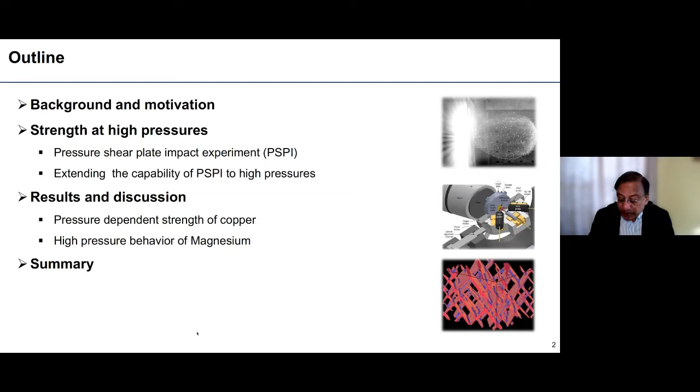First I will give you some background and motivation for why we are doing this work, then I'll talk about the pressure shear plate impact experiments and extending the capability of this technique to high pressures. Then I will present results on two materials, primarily copper, which is a good model material to validate this technique and to look at interesting phenomena at high pressures, as well as a brief introduction to the high pressure behavior of magnesium, and then provide a summary.

So why do we study this high pressure behavior? As this audience knows well, there are impacts and blast events, many involving very high pressures, ranging from bird impact to hypervelocity impact.

There are many impact events, some of which are shown here. Bird impact is a major problem for airliners. For example, this was the landing known as the Miracle on Hudson, a US Airways flight taking off from New York that was hit by birds and had to land on the river. Miraculously, everybody survived.

Of course, ballistics and armor/anti-armor problems are of great interest. And hypervelocity impact, which involves very, very high pressures, is also of interest. Hypervelocity impact could be anywhere from 2 to 20 kilometers per second, reaching very high pressures and very high temperatures. So we want to understand high strain rate, high pressure phenomena in these cases.

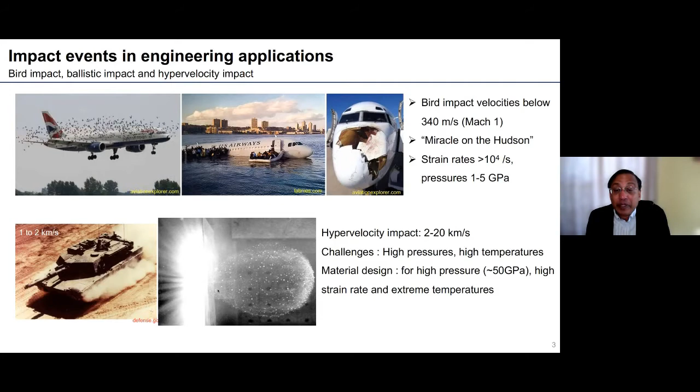To model such problems, we need accurate constitutive models. These models, as we know, are a function of strain rate, temperature, and other variables. Typically we don't consider pressure at relatively nominal levels, say on the order of 5 to 10 GPa for most metals, since these pressure effects are not important. But we are interested in very, very high pressures.

As mentioned, one of the applications is hypervelocity impact. You can imagine the number of objects in the vicinity of the Earth that are tracked every day is very large, with small or bigger objects traveling at velocities in the range of 5 to 25 kilometers per second.

Of course, this can cause considerable damage if they impact space assets like the International Space Station. Here I show one example where the Zarya section of the International Space Station was impacted by a micrometeorite. This could have deleterious effects on structures, space structures.

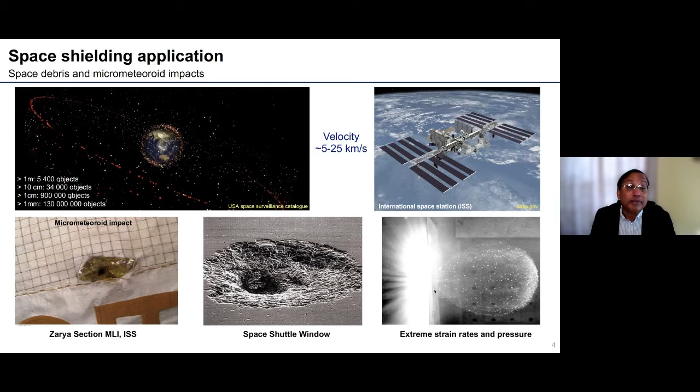And obviously we know from hypervelocity impact, we could have phase transformations, not only from solid to fluid to plasma, but also materials undergoing solid-to-solid phase transformation and other associated phenomena. So we need to understand such phenomena in great detail and be able to model it. The other applications are both terrestrial and space applications.

For example, in planetary science and recent energy applications such as creating fusion in the lab, this involves very, very high pressures. For instance, in the creation of our own moon about 4.5 billion years ago, due to the giant impact hypothesis, there was an impact on the proto-Earth which created the moon. To model such impacts, one needs to know the high pressure behavior of materials, including strength and flow behavior, to accurately model this phenomenon.

In geophysical applications, these high pressures are very common. For example, the pressure at the core of the Earth is around 360 gigapascals, which is very high, and one needs to model the material behavior at this very, very high pressure. If you go to planets like Jupiter, this could approach 1 terapascal.

As I mentioned earlier, inertial confinement fusion is one of the holy grails in creating clean energy. You want to produce the conditions in the sun, which can approach 10 to the power 4 terapascals—these are very large pressures.

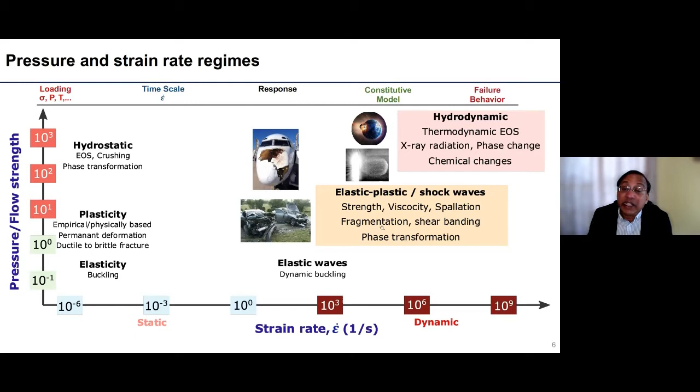We want to understand this whole range of phenomena. One of the things that governs fragmentation and failure is the strength of the material, which is what we are interested in understanding at high pressures. We have numerous techniques to address these problems.

At low strain rates, one uses hydraulic or servo-hydraulic machines, or screw-driven machines, to understand the strength behavior of materials—yield stress and flow behavior—which is very well characterized. Another technique used for high pressures is the diamond anvil cell, a very elegant technique that can reach very high pressures, but under quasi-static conditions.

When you go to high strain rates, one uses techniques such as plate impact. Many of us work with the Kolsky bar, or Split-Hopkinson bar. In this case, the pressure is nominally zero due to the limited uniaxial stress condition, and it can reach high strain rates on the order of 10 to the power 4 per second.

With recent advances in technology, numerous facilities are now available, such as the Z machine at Sandia National Labs, which can reach pressures on the order of 1 terapascal, and the National Ignition Facility at Lawrence Livermore National Lab, which can reach very high pressures. People have looked at the equation of state of materials in the terapascal regime.

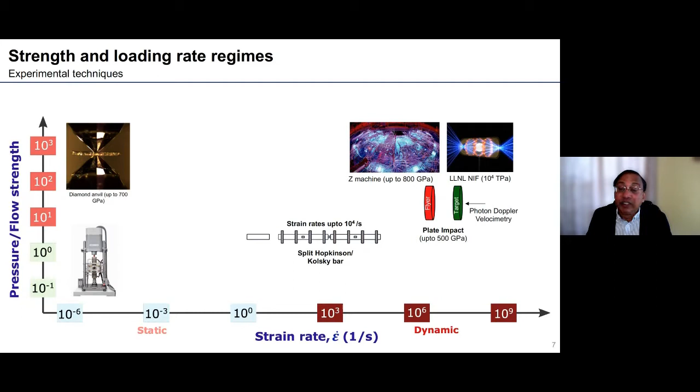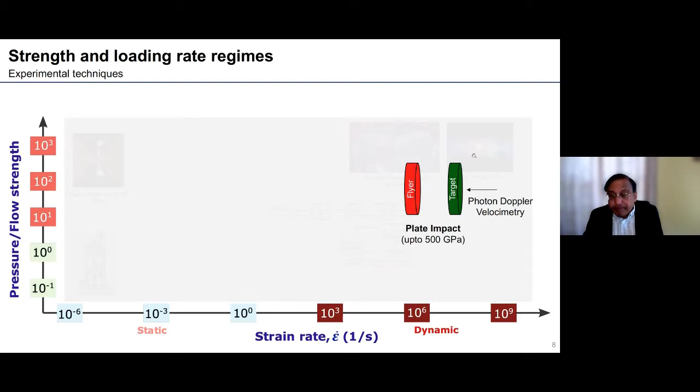The normal plate impact technique uses methods such as PDV, photon Doppler velocimetry, or VISAR, to measure the response at the free surface or at the interface with a window, to understand the evolution of the normal velocity profile, from which one can obtain the equation of state. This is a well-established shock wave technique, where an impactor impacts a target, generating a shock wave and uniaxial strain conditions—strain only in the direction of compression—achieving a stress state close to hydrodynamic.

Here you have the normal stress and the transverse stresses. Due to the inertial confinement, at very high pressures, you could approach a hydrodynamic state of stress. Nevertheless, the strength of the material is important at these high pressures, meaning the transverse stresses, sigma y and sigma z, which are equal,

differ from this normal stress, and that's where you have the shear stress. If you use the Tresca condition, the strength of the material could be an order or few orders of magnitude smaller than the pressure. This poses great challenges in measuring the strength of the material because it's a small number compared to the pressure. So you need a way of directly assessing the strength of the material at these high pressures.

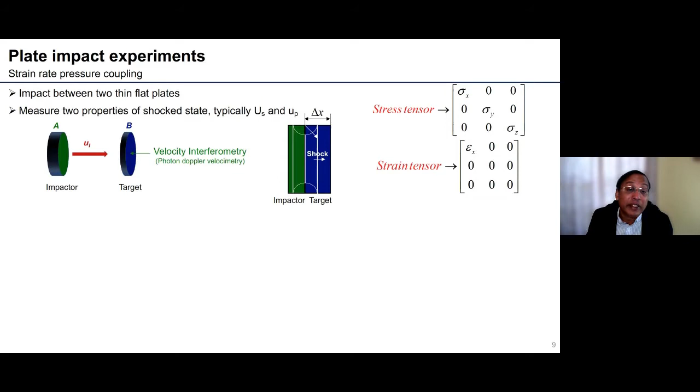One of the primary uses for this work is to create the so-called equation of state, the relation between the particle velocity and the shock wave speed. The shock wave speed can be measured by the arrival time at the free surface, and the particle velocity is measured by the free surface velocity. Then normally one sees a linear US-UP relation, the linear relation between the shock wave speed and the particle velocity.

One can obtain the normal stress by using the jump conditions, or the Rankine-Hugoniot conditions, using the formula of density times the shock wave speed times the particle velocity.

Many of us are interested in the flow strength of the material as a function of strain rate. As we approach the high strain rate regime beyond strain rates of about 10^3 per second, at least in metals, you have dislocation drag control mechanisms where you see a sharp rise in the flow strength of the material as a function of strain rate. As you approach strain rates of 10^6 to 10^9, this flow strength would be extremely high.

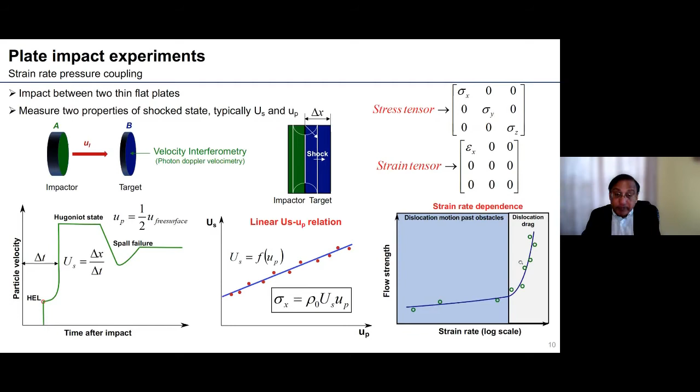We are not the first ones to think about how to measure strength at high pressures, but there are many challenges associated with measuring strength at high pressures.

One very interesting technique used both in plate impact or impact-related experiments, as well as laser shock experiments, is using the Rayleigh-Taylor instabilities, whereby you put small perturbations on the surface of the material, and this is being shocked. While being shocked, these perturbations grow due to the Rayleigh-Taylor instabilities or Richtmyer-Meshkov instabilities.

As you shock the material, if the material is strong or the strength is high, the ripple growth will be small. If the material is weak or has low strength, the ripple growth will be high. This gives a qualitative measure of the strength of the material, and one can do numerical simulations of this instability growth, then achieve high pressures and obtain the strength. But at the same time, there is high uncertainty in the coupling of strain rate and pressure, because in this ripple growth, the strain rate and pressures vary, or they're spatially non-uniform.

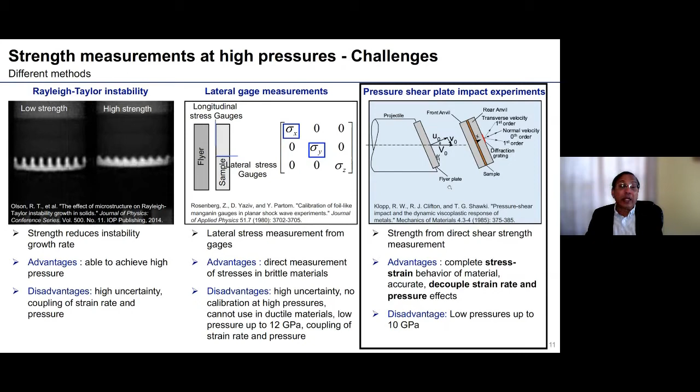This was the technique developed by Professor Clifton at Brown University, as I mentioned, four decades ago. It involves impacting this hard plate against the target, which consists of two anvil plates with a sample sandwiched in between.

You generate both normal and shear waves in the anvil plates, in the target, and the flyer plate. The longitudinal waves, or pressure waves, propagate faster, and the shear wave trails. When the pressure wave arrives, the normal longitudinal wave arrives at the interface at the sample.

There is a thin sample sandwich, and it reverberates within this sample, so it attains sort of pressure equilibrium. By the time the shear wave arrives, this is normally at a constant pressure.

Also, the advantage of such a sandwich technique is that you are creating a ramp loading, meaning you're creating quasi-isentropic loading. That means your temperature increase can be moderated, and so you create essentially a ramp loading in some sense.

Then the shear wave comes here and it probes the strength of the material. So it is at a nominally high pressure, and this shear wave probes the strength of the material as it arrives at the rear surface.

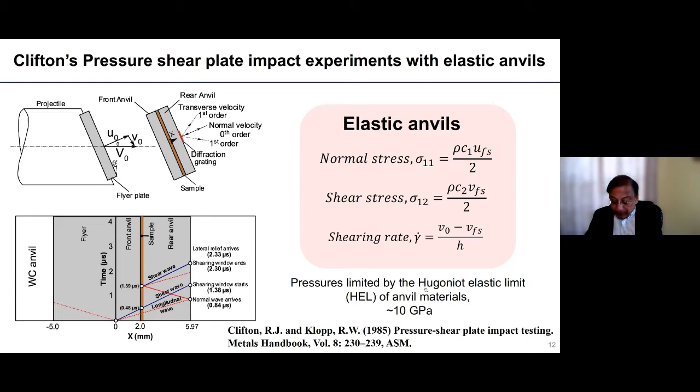We want to use pressure shear plate impact experiments, an elegant technique which has been very powerful in studying material behavior at high strain rates, but nominally low pressures on the order of about 10 gigapascals or so. We want to extend that beyond this regime. But there are numerous challenges associated with the technique, experimental setup, diagnostics, and how you analyze this problem when you exceed the Hugoniot elastic limit. These are the things I'm going to describe in the next few minutes before I show you the results on copper and magnesium.

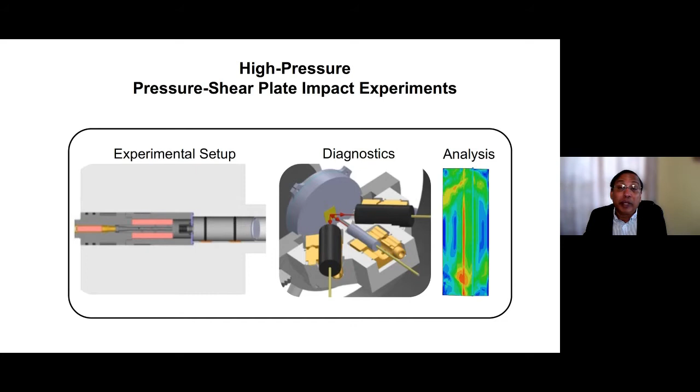As we can intuitively understand, especially this audience, higher the velocity, higher the pressure. So we need to be able to launch projectiles at high velocities. What we have done at Caltech is use a powder gun. The powder gun, or propellant gun, is used for studying normal plate impact experiments, and this can launch projectiles on the order of 2 kilometers per second.

Using this powder gun, which we use for normal plate impact experiments, we have introduced a keyway to prevent the projectile from rotating. Because when you launch these projectiles to impact at this oblique angle, we cannot tolerate rotations in the projectile, or you won't have parallelism between the impact faces. So to prevent the rotation of the projectile, we introduce a keyway in the gun. This is what we have done.

With the facility we have, we can launch projectiles between the range of 200 meters to 1500 meters per second. Normally, in current plate impact experiments, projectiles can be launched on the order of 400 to 500 meters per second using single stage gas guns, and this is also limited by the analysis to about the Hugoniot elastic limit. This is the first modification we did.

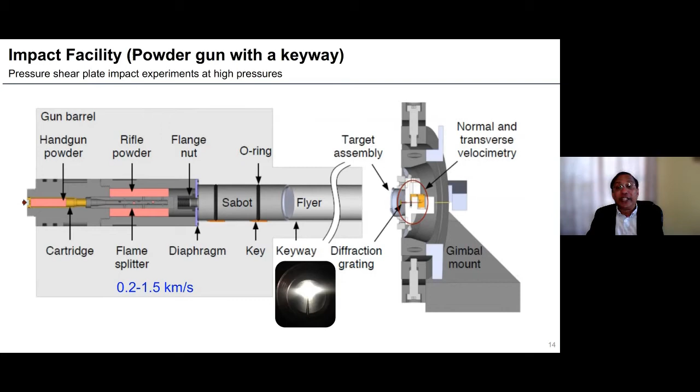The second thing we had to do is have a robust measurement of the free surface velocities. There is a diffraction grating deposited at the rear surface of the sample, where you probe and measure the normal and transverse velocities. To increase the robustness of the measurements, we took the PDV, the photonic Doppler velocimetry, and created a system where you can do heterodyne transverse velocimetry, so that we can measure both normal and transverse free surface velocities using these photonic Doppler velocimetry techniques.

This is a fully fiber-based technique where you can see the 3 probes: the normal probe, and the two transverse probes, which are collecting the plus and minus 1 diffracted beams. Using the traditional analysis, one can obtain the transverse velocities from the transverse probes using this heterodyne transverse velocimetry. The normal probe is essentially the conventional PDV, or photonic Doppler velocimetry.

The diffraction grating provides a great advantage in making these high fidelity measurements possible. The heterodyne transverse velocimetry probes are again fiber probes, along with the normal probes used in the normal measurements. We use high-speed digital oscilloscopes to measure this. So this is a fully fiber-based system capable of measuring both the normal and transverse velocities.

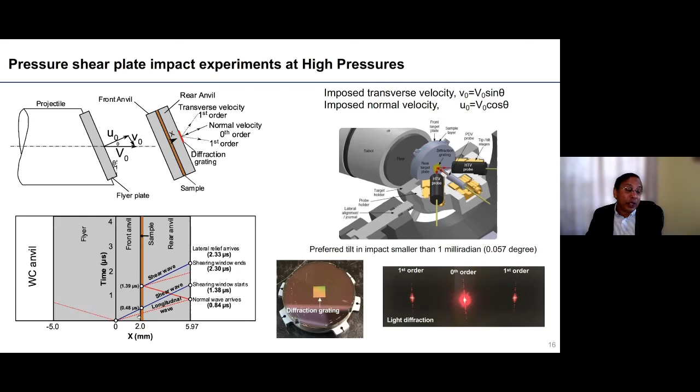But the problem still remains that we are exceeding the Hugoniot elastic limits. So what do we do? How can we obtain it? Now what we're interested in is introducing this new variable, the pressure, as the flow stress as a function of strain rate, pressure, and temperature. So how do we include this?

So we've developed a technique whereby we characterize the anvils. We know that the anvil plates are going to undergo inelastic deformation, so first we calibrate the anvils. We do this by performing impact experiments using oblique impact at nominally the same velocities as we would conduct the pressure shear plate impact experiments on the sample. We conduct this at similar velocities and similar pressures so that we can calibrate a material model.

What do we mean by calibrate material model? I'll show you some of the details later, but essentially we're developing an inelastic, or flow stress as a function of strain rate and temperature and so on, for these anvils by performing independent measurements. This is first how we calibrate the anvil material, so now the anvil material is completely characterized.

Now we can conduct the experiments and again obtain the free surface velocity. Essentially our normal response is dominated by the anvils, because the pressure is still being transmitted across the sample and the same pressure wave is propagating - it's only slightly altered by the presence of the sample. But the shearing response is now quite different from the symmetric experiments where we calibrate the anvils, because the shearing response is now dominated by the sample.

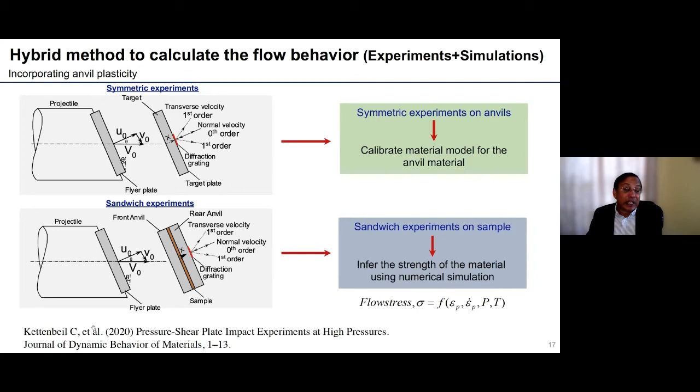The details of performing this plate impact experiment at high pressures has been published last year in the Journal of Dynamic Behavior of Materials. Now let me show you the calibration of this experiment.

These are the symmetric impact experiments on tungsten carbide, ranging from 300 meters to 900 meters per second. The normal stress, or nominal pressure, ranges from about 14 GPa to about 42 GPa.

Here we show the normal velocity and the transverse velocity - in green, this is tungsten carbide on tungsten carbide, both normal and transverse velocity. As you can see, we can clearly observe the HEL, the Hugoniot elastic limit - in this case about 6.5 GPa. Then we see the elastic-plastic shock, which is steepening as the pressure increases, and then the shock state, going from 14 to 42 GPa. So the transverse velocity is plotted here.

And this is the normal velocity, as I mentioned, ranges from about 300 to 900 meters per second. But the transverse velocity is much less.

Here the obliquity angle, the skew angle, ranges from 18 degrees to 3 degrees. As you see, we reduce the skew angle as we increase the pressure or the impact velocity to prevent sliding. So when we go to low skew angles, we go as low as 3 degrees, and we also maintain very good tilt, less than 1 milliradian.

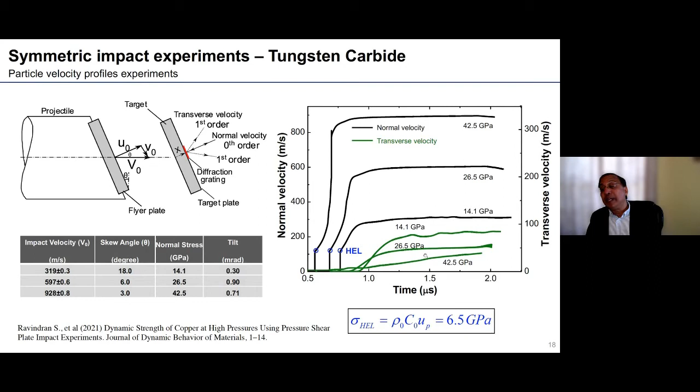Now let me show you the calibration model for this. We use a power law for the tungsten carbide, and we do direct numerical simulations, so the normal response is very well studied. For the strength of the tungsten carbide, we use a power law for the strain hardening, a Cowper-Symonds form for the strain rate hardening, and a Johnson-Cook kind of model for thermal softening. Here are shown the parameters.

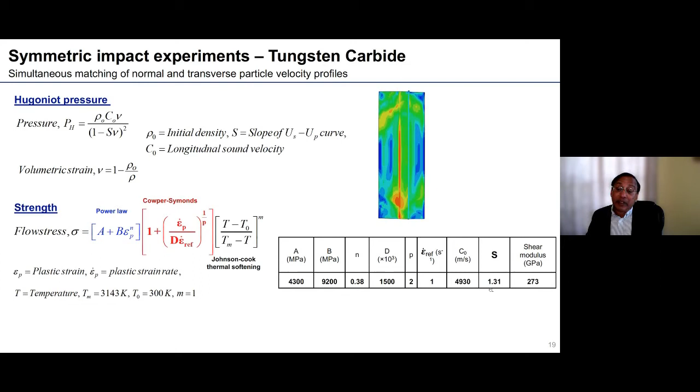I'm not going to go into the details, which you can see in the papers. This S is the slope of the Us-Up curve, and this is well known in the literature for tungsten carbide. So now what do we do? We do the numerical simulations until we get the best match, and you can see the details of the constants explained in the recent paper just published.

So here we see the tungsten carbide, which I showed you the normal and the transverse response. Now you can see the dashed lines are the simulations. We can capture extremely well, obviously, the normal response.

I want to emphasize that having this transverse response not only gives you the strength model. Obviously, people use strength models even when modeling just normal plate impact experiments, the shock experiments. There, in some sense, the plasticity parameters or the strength parameters are unconstrained, not so well constrained. When you have transverse velocity measurements together with the normal velocity measurements, this becomes a highly constrained problem. So we can get very good representation of this material model. We are confident that we have a very good material model for the tungsten carbide here.

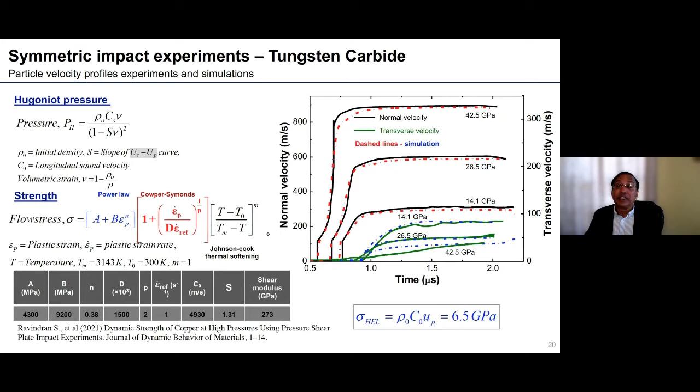Now let me switch to discussing the results. I'm going to show you examples for two materials. One is a polycrystalline OFHC copper, which has been widely studied at high strain rates.

So here what we are going to do is look at the strength at different pressures, but we are going to fix the strain rate nominally at 10 to the power 5 per second. I will explain why we are limited in the strain rates in a minute. So once again, we use impact velocities from about 200 to about 900 meters per second. Again, the skew angle, the obliquity angle, in this case ranges from 12 degrees to 3 degrees.

The pressures range from 10 to 43 GPa, and the anvil material and the flyer material which we use are all tungsten carbide. This tungsten carbide, as I mentioned, has the Hugoniot elastic limit of 6.5 GPa.

The grain size in this OFHC copper, which is fully annealed, is about 100 microns or so - 110 microns in this case. Of course, we know the crystal structure for the material copper is FCC. The thickness of the sample is 170 microns, and the diameter of the target, which is limited by our gun, is about 30 millimeters.

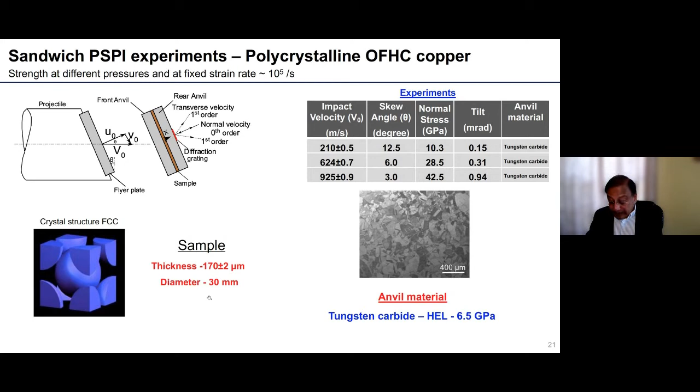So now let me start showing you the results on the copper. I plot the normal velocity and the transverse velocity. And the normal velocity is plotted here. Once again, you can see the Hugoniot elastic limit. As I mentioned, the normal response is dominated by the tungsten carbide, which is to be expected, which is just the pressure wave response.

The pressure is completely transmitted by the thin copper sample.

But now we look at the transverse velocity. Even at 43 GPa, it's about 13 meters per second, while the normal velocity is around 900 meters per second. So there's an order of magnitude difference. We need a very accurate measurement system, this heterodyne transverse velocimetry, using photonic Doppler velocimetry technology, to resolve such low velocities at these high impact speeds.

So unlike the conventional plate impact experiments developed by Clifton, we can't directly infer the strength of the material. We have to do additional numerical simulations, and the results for copper are presented in a paper that was just published recently.

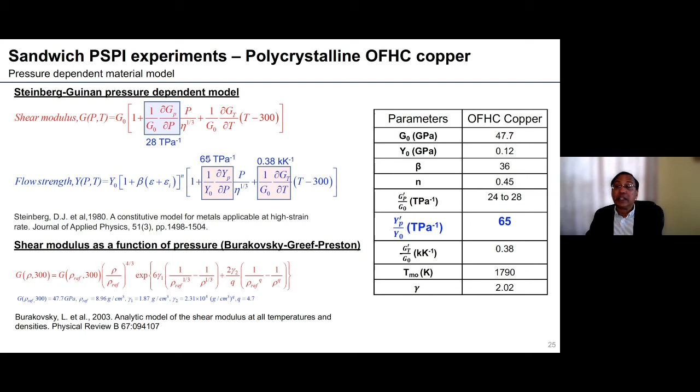When we don't assume they're the same, and instead change the variation of yield strength with pressure to about 65, roughly 2.6 times the value for shear modulus with pressure, the results match much better. As is well known to people who do simulations, the normal response can be fitted with any kind of inelastic flow strength model. But the additional information from the transverse velocity lets us fit the model much better using these constants, giving us confidence that we're on the right track.

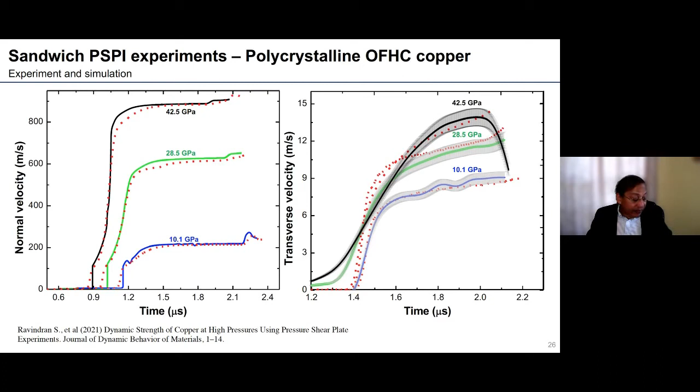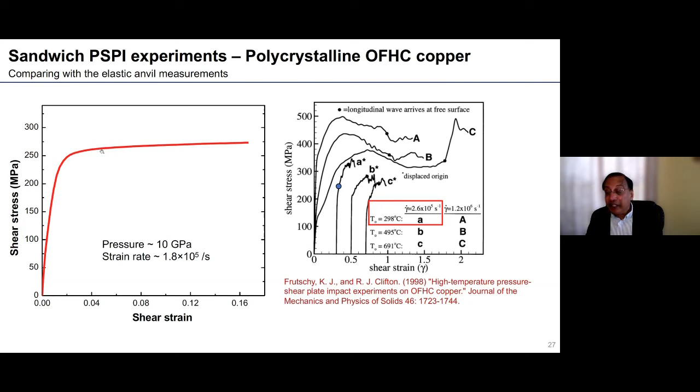We want to have a sanity check of whether we are getting the right numbers. These are results from Clifton's experiments with Frutschy, plotted as shear stress as a function of shear strain. Here you can see what is denoted as A, at ambient temperature, with a strain rate pretty close to what we have. The values are comparable, about 260 MPa or so at this nominal pressure of 10 GPa.

Now we can plot the same thing for the response at different pressures. What you see is a substantial increase in the shear stress, the flow stress, as a function of pressure. There's a considerable increase, going from about 260 to about 630 MPa.

As I mentioned, our strain rate is limited at this 10 power 5 per second because the anvils are yielding, they are not remaining elastic anymore, and this limits the strain rate which we can achieve. This is something we are again working on, how to achieve these higher strain rates.

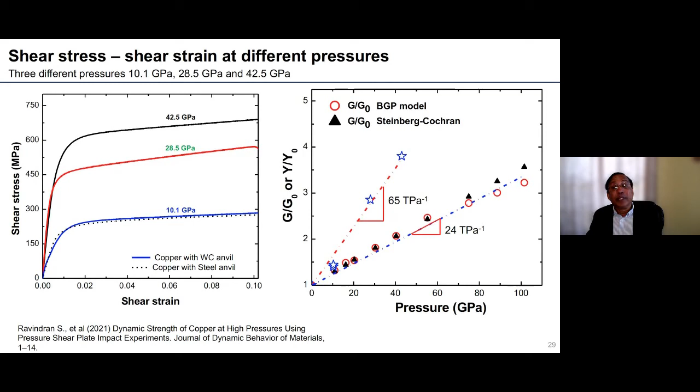So we wanted to understand what are the mechanisms leading to this pressure dependent strength. We are performing molecular dynamic simulations. This is the work of Suraj Ravindran, who is currently performing the simulations, for copper, using LAMMPS.

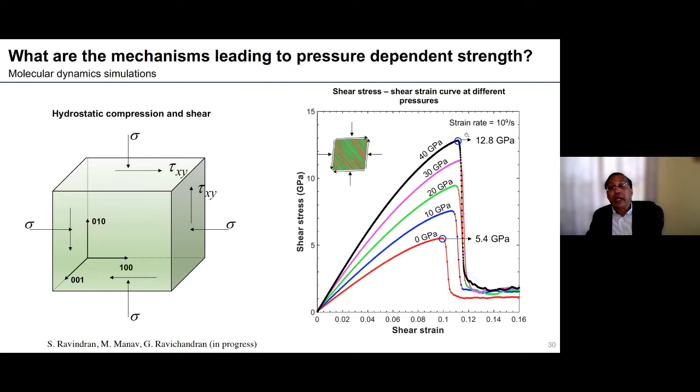So we go from no pressure. Initially the microstructure is defect free, we apply pressure and then it's being sheared. Obviously, since it's defect free initially, we get this very high strength. And then we can look at the different dislocation structures which form using these MD simulations.

What we find is that we can find the yield strength. We had a value of 65 in our experiments. The molecular dynamic simulations are giving us a value of about 34 or so. And we can also obtain the scaling for the shear modulus.

From the molecular dynamic simulations, the shear modulus shows the same values as assumed in the Steinberg-Guinan model, which is close to 34 per terapascal. As I mentioned, the Steinberg-Guinan model assumes 28 per terapascal, and in the experiments we are observing that the yield strength scaling is on the order of 65 per terapascal, and this is yet to be resolved.

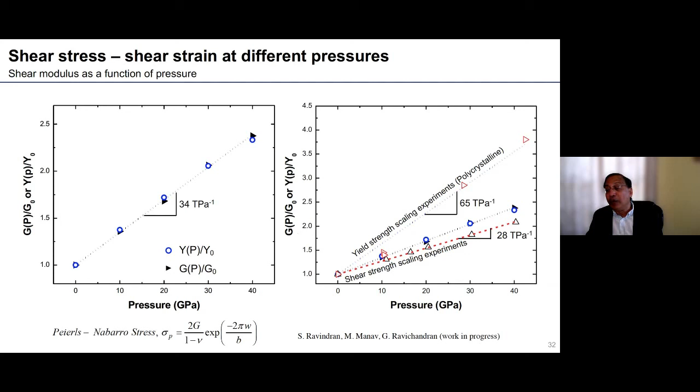We believe one of the reasons has to do with the Peierls barrier at high pressures, how the Peierls-Nabarro stress varies, and this is something we need to look at in more detail in the core structure. Also, the simulations we have done are essentially single crystals, so we need to account for grain boundaries and interfaces and other mechanisms associated with this. This is work in progress.

So let me very briefly mention our work on magnesium. We have looked at other materials, but I'm just going to show you very briefly on the magnesium. Once again, we perform experiments.

As you know, magnesium is a lower strength material. Here, once again, the shearing window is about 1 microsecond. We are compressing along the extrusion direction along the a-axis, and then we are shearing along the rolling radial direction.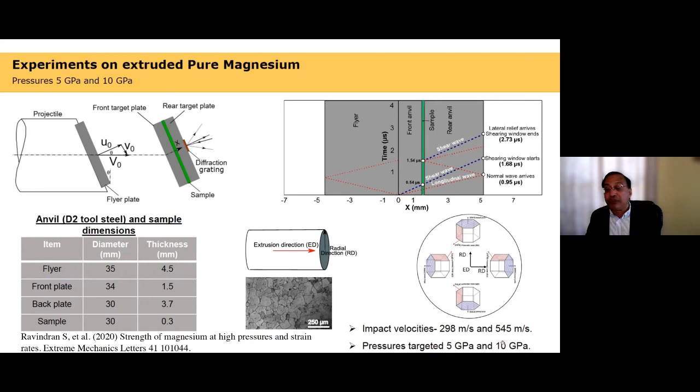Here we only look at pressures, low pressures of 5 and 10 GPa. The grain size is about 70 microns.

If you look at the normal velocity and the transverse velocity, once again we can use our model to fit this extremely well. Having the transverse velocity, we are able to constrain the plasticity model extremely well. So this is at 5 and 10 GPa.

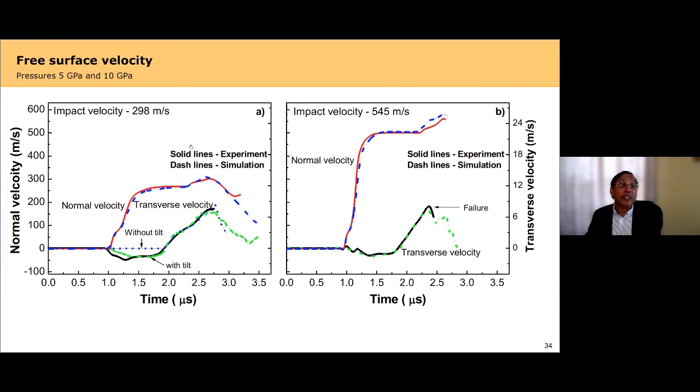We find that there are some different operating mechanisms, because there is a temperature increase which we need to account for due to the shock in the material, and also in the shock case the material is pre-compressed before the shear wave arrives. That also creates complications in the anisotropy of the material.

That is why one of the surprises we had was that when we did split Hopkinson pressure bar experiments, it showed higher strength than the experiments in the plate impact experiments. This is something which we have explained using the mechanisms operative here.

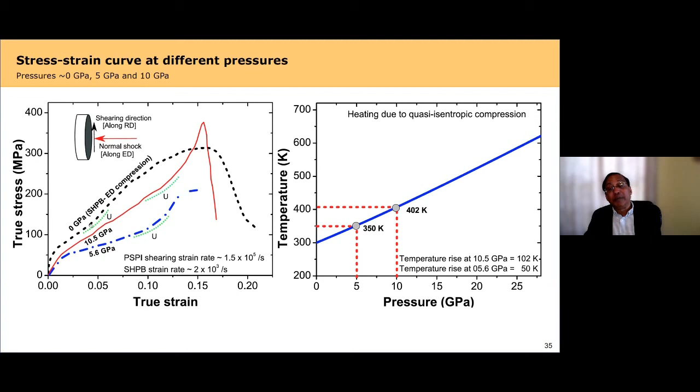This is due to the fact that when you have higher temperatures, it favors slip rather than twinning. When you compress it along the axis, there should be extensive twinning, and the increase in temperature suppresses this twinning, as shown in the literature.

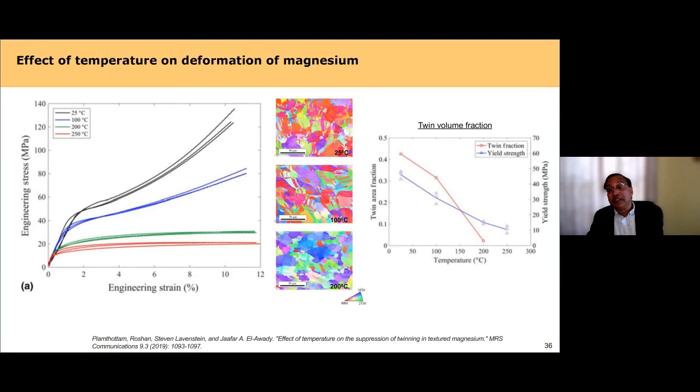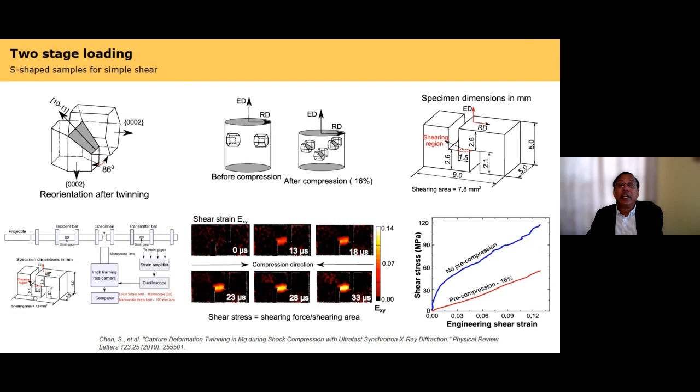So there's some rich physics in this kind of inducing anisotropy due to shock and then shearing the sample. We are still trying to understand these mechanisms.

Let me conclude. I hope I have convinced you that we can extend this pressure shear plate impact experiment to higher pressures. In this case, we have extended it up to 50 GPa, and we can take this to higher pressures if we can find good anvil materials as well as other techniques to impact at higher velocity.

One of our main contributions has been to incorporate the anvil plasticity, and we have shown that in copper, the flow strength increases about 2.8 to 3 times when the pressure goes from about 10 to 40 GPa. Also, the yield strength scaling for copper appears to be different from the shear strength scaling, which is assumed to be the same in the literature.

I also showed you very briefly that the strength of magnesium is pressure dependent, and there are very interesting mechanisms which operate in magnesium for why this is the case, because of the temperature increase and the reorientation of the crystals.

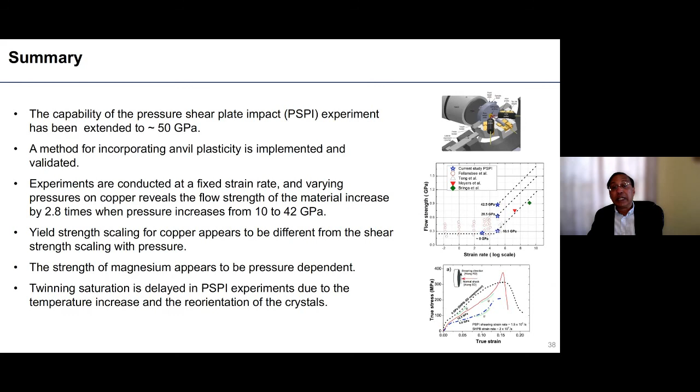I have the pleasure of coming and talking to you, but this is really the work of many talented people in my group, past and present.

The high pressure extension posed numerous challenges, but these challenges didn't deter two really outstanding colleagues, Christian Kettenbeil and Zev Lovinger. They made this technique possible in collaboration with Michael Mello, developing this interferometric technique of heterodyne transverse velocimetry.

The results which I've shown here are primarily from the work of a very talented postdoc in my group, Suraj Ravindran. He has been responsible for doing the experiments on copper and magnesium which I shared with you, and he is assisted by a graduate student, recent graduate, Vatsa Gandhi.